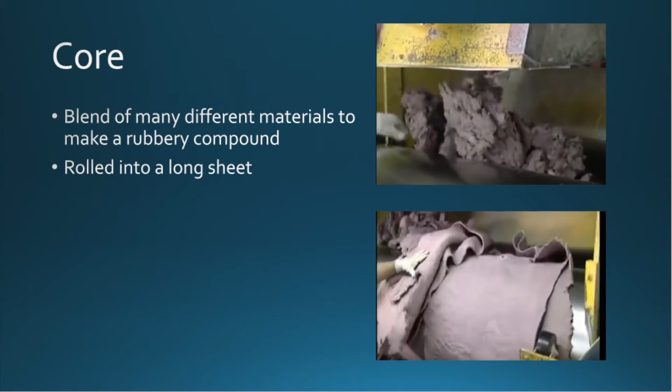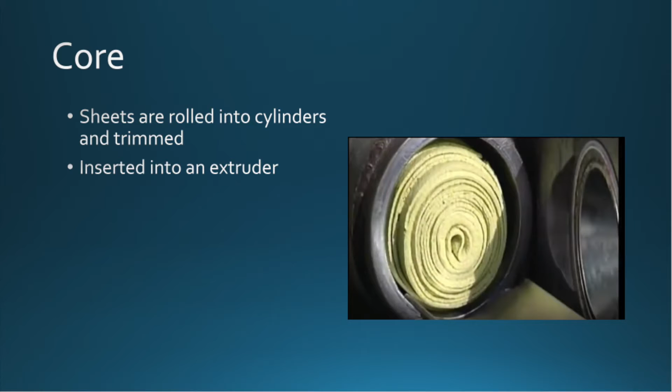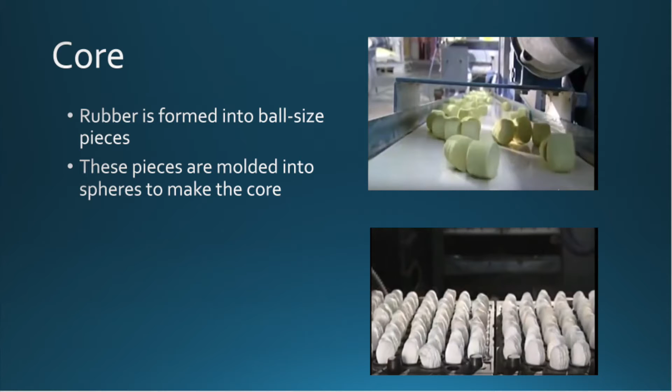These small pieces are then placed into a spherical mold so that they can be turned into perfect spheres and used in the ball. The bottom picture shows the pieces that have just come out of the extruder about to be molded into spheres. This is what the rubber looks like after it comes out of the mold, a perfect sphere. The next step is to give the balls their exterior.

This is done using an injection molding system. First, the rubber cores are placed into a mold that is slightly larger than the cores and has the dimples that are on the outside of the golf ball. The cores are centered into the mold using metal pins. After the mold is closed, melted plastic is injected into the mold and hardens on the outside of the ball.

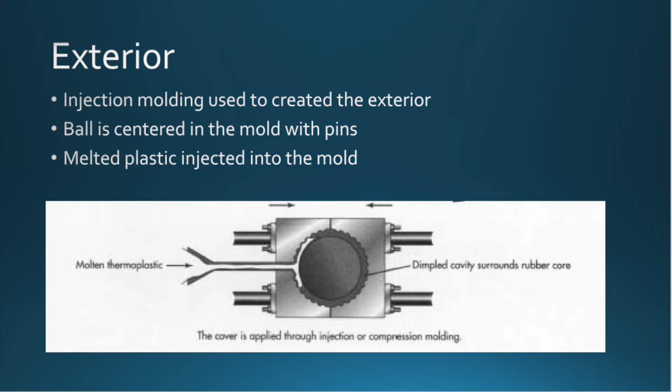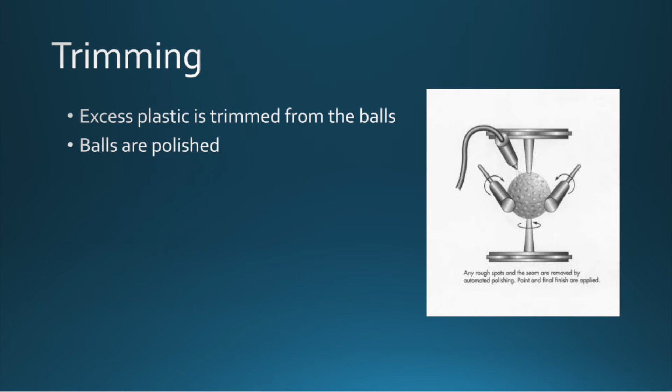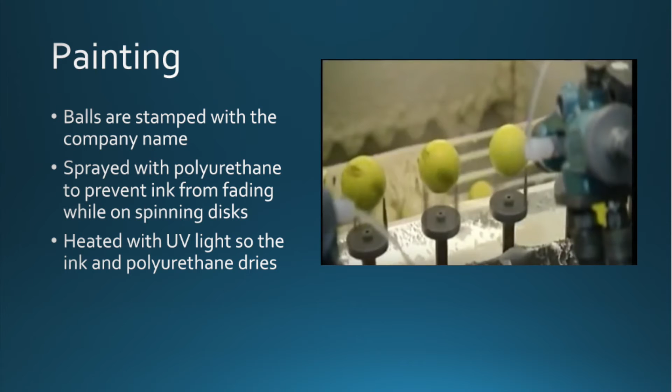they are uniformly smooth. After this, the balls are stamped with the company name and sprayed with a polyurethane coating to prevent the ink from fading. In order to do this, the balls are placed on spinning discs while a spray gun sprays the outside of the balls with the polyurethane. After the balls are sprayed, they are heated with ultraviolet light so that the polyurethane coating dries.

The balls are then tested to make sure that they are uniform and comply with the USGA regulations for golf ball size and weight. They are first x-rayed to make sure that the rubber core is perfectly centered inside the ball and are mechanically tested for size and weight.

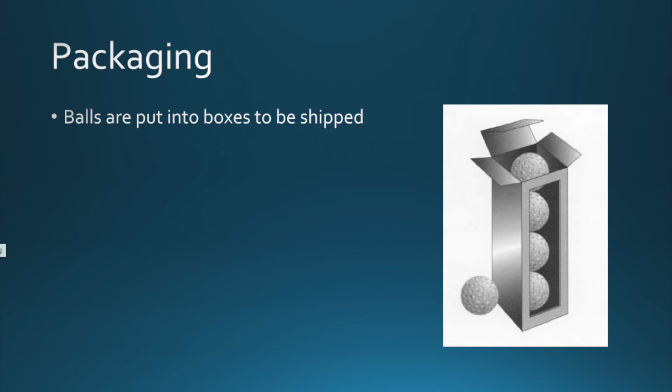The USGA regulations for golf balls is that they must have a diameter of at least 1.680 inches and weigh no more than 1.620 ounces. After they are tested, the balls are packaged into boxes to be shipped.

Now I will talk about the aerodynamics of how a golf ball flies through the air. The dimples on the outside of the golf ball have a significant effect on the flight of the ball. Since a well-struck ball will have backspin, this creates a lift force on the ball by pushing the oncoming air over the top of the ball.

This creates a difference in pressure between the top part and the bottom part of the ball, similar to how an airplane wing creates a difference in pressure between its top and bottom halves. This difference in pressure creates a lift force, which allows the ball to fly further than it ordinarily would be

able to. The dimples on the ball also stabilize the ball in flight, meaning that the ball will fly straighter than if it did not have these dimples. The dimples on a golf ball also mean that if the ball is spinning sideways instead of backwards while it is flying, the ball will curve to the left or the right.

Skilled golfers sometimes curve the ball in order to avoid obstacles while they are hitting. This kind of shot is called a draw or a fade.